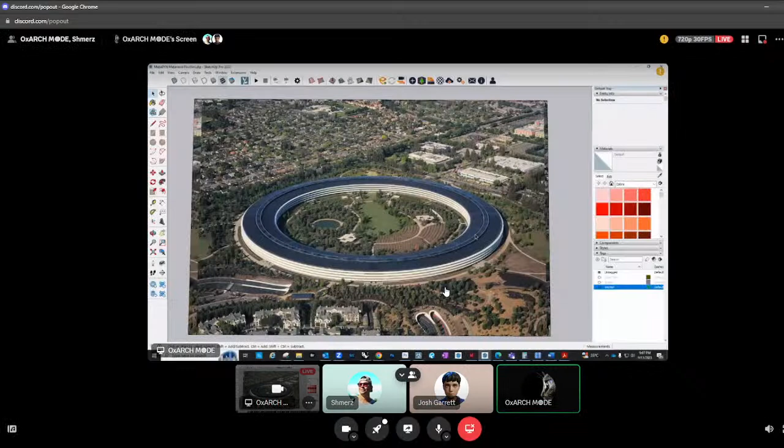Shmerz and Josh reached out to me with a project idea that they're working on and needed a bit of architect experience. They were initially inspired by the Cupertino Apple headquarters. We're going to do a modeling exercise today to show you a software that's a bit simpler than Blender, but a very common software that architects use. We'll explore how the software works at a high level, and also try to design something within an hour time frame.

Excellent. I want to say something. This project has the goal to make one space, a space for MetaDyn, the project of Josh Garrett. We want to make lives about every step needed to make your space, your environment, from scratch, and we will use Unity and specifically the Spatial Creator Toolkit. So enjoy these incredible guys who will show us how to use this amazing software.

All right, shall I get started? Sure. For anyone who doesn't know yet, SketchUp is a free software. It starts off with this very simple toolbar on the side, and you'd be surprised how much you can do with it. Everything I'm going to do today only uses this toolbar, to show how easy but also how flexible it can be. If there's any questions, feel free to ask. Because of the 1 hour time frame, I've got a few things set up, and I can explain as we go.

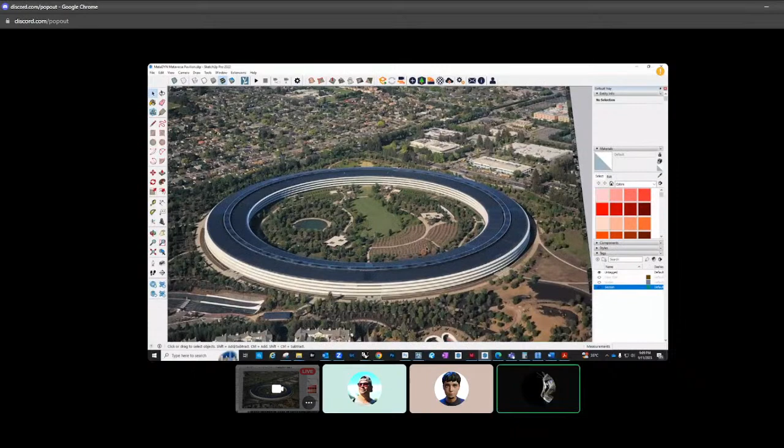When they reached out to me with the Cupertino headquarters idea, it was basically the campus and this landscape space in the middle that was very fluid and open. The idea is you have an indoor space for showcasing elements, whether avatars or unique elements. And then the campus space will be for showcase and tutorials, and I think there's even going to be a racetrack.

So the idea here started off as a section, and it's a very simple section, but I can kind of show you exactly what we're thinking. So we know it's going to be round, so our floor plan is round, and we have a decent amount of space of roughly 100 meters diameter. And then the building itself is just going to rotate around this circle, and then we'll have a dynamic landscape that can be adapted in further videos.

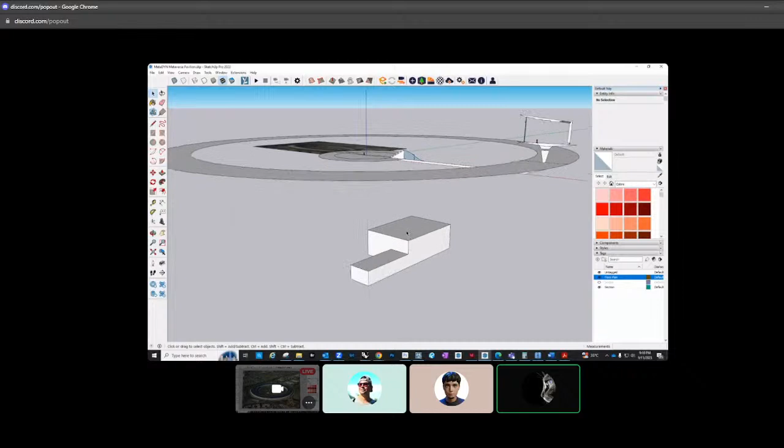So in terms of how SketchUp works, essentially you draw lines, and as you draw the lines, you eventually have a face. For anyone who's new to SketchUp, they think that maybe they can just keep expanding and expanding. But the thing about this particular method is it's like the sticky method, so it's very difficult to edit. So there's an ability to group something. By triple clicking something, right click and make group. Nice. Groups, when you edit one, doesn't edit the other.

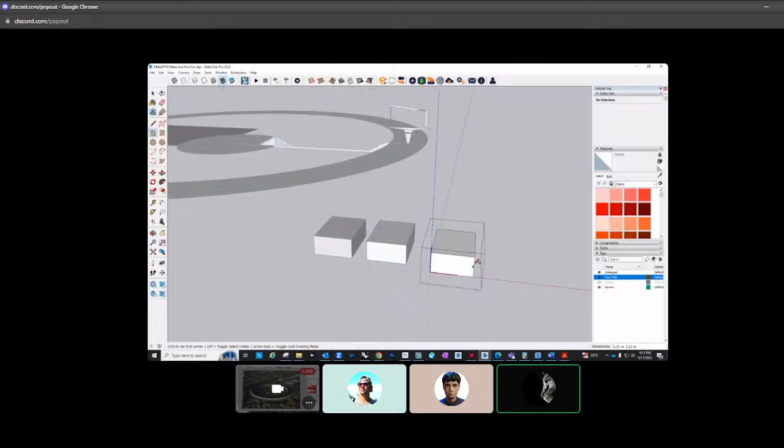So if you want to create something that will be edited many times, whether it's some sort of detail, a mullion, or any sort of architectural element, you'll make it into something called a component. And this component can be named, doesn't have to be, but I know that in Blender, if you name it, it will be easier to find it. So if I make a component really quick, you will see that if I edit this one, it will edit the other one. And this is just the basics, so always model with this type of mindset. So a component is like a prefab in Unity, I'd guess, or something like that.

Cool. And then one last thing, say you've already placed the components, but you want to make it unique. You literally right click and you make unique. So now this one is no longer the same as the other ones. So that's the basics for how to model. Once you get these things down, the rest is quite simple. There's an ability to revolve, which is basically just taking a profile or a pathway and then revolving it. So we'll be revolving as well. And then you have scale and offset. So really within all of this, you have all of the shapes, squares, circles, and so on.

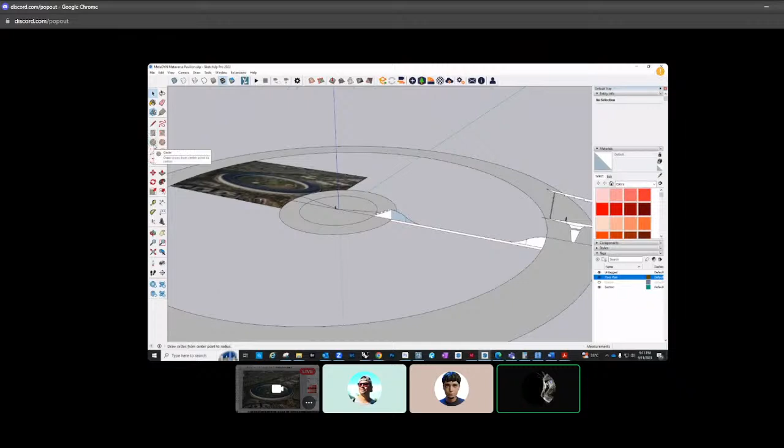But it's really important also to mention that since we're in a metaverse space, the circle itself is made up of a series of polygons. So if I type 12, I will have a 12-sided circle. And this is quite useful because when you're trying to reduce the number of polygons, you can reduce it here quite easily. So when I made this circle, the least amount of facets or edges required, while still not making it too faceted, was around 120. And if in the future when we import it into Unity we need to reduce it, it's quite easy to reduce.

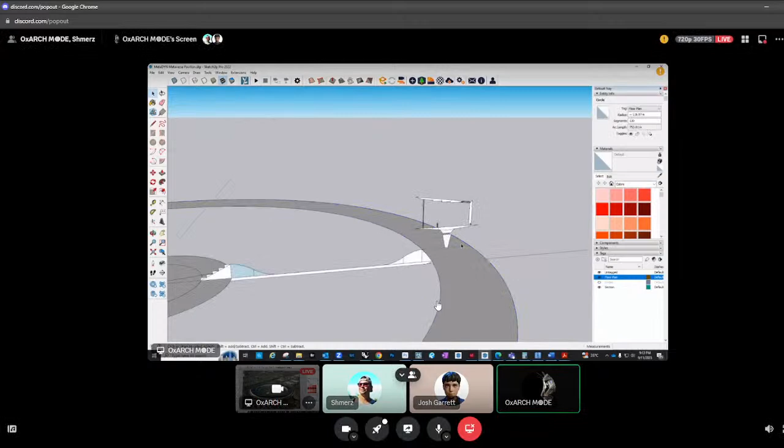Okay, so regarding the floor plan, it's quite simple. We have the circle ring building, and then we'll have the landscape space here. In the middle, we'll have an amphitheater space where there can be a screen for tutorials. Alright, so if there's no questions yet, I will just get started. Essentially, I'm just gonna take this ring, paste it, and start to revolve some of these architectural elements. And you'll see that very quickly we can start to build a space.

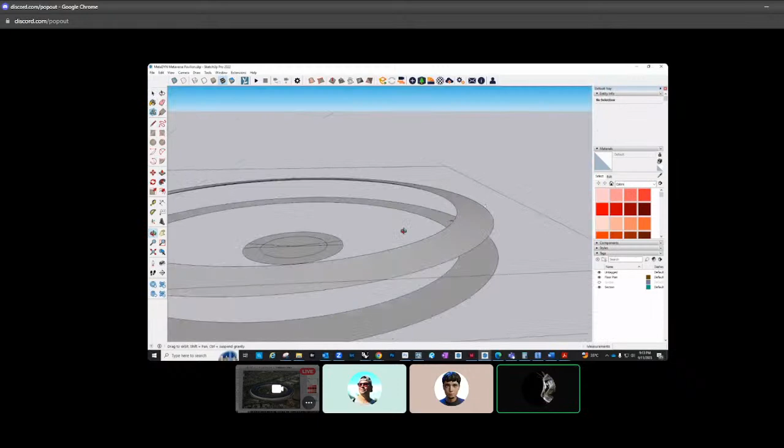Oh, wow. Yeah, it's just that fast. Wow. So I'm actually going to take all of these elements, and this is our section. We're going to revolve around this face. So we have all of this, and we just go like that. So all of that's revolved now. And we just do the same for the rest. So this is going to be like a back wall. Then we have the floor, which I'm going to include some glass into.

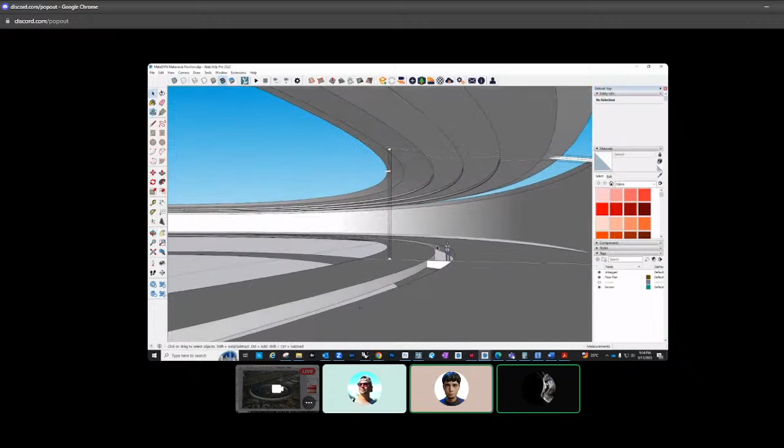Alright, so now, because nothing is touching, it's fine, but I'm going to make all of these into a group. I'm just triple clicking and that will select everything. Okay. And what else do we have here? Make group. Okay, so that is part of our section. Wow. This is a bit of the interior space. So underneath this wall is going to be glass. Up here will be glass. And then facing the courtyard will be glass. And then I'll also introduce some glass in the floor to make interesting moments. And then we'll get to the landscaping.

So for the glass, what I'm going to do is first take these mullions. And we don't have to have mullions, by the way. It's the metaverse. We can do anything we want. But I'm going to take these mullions and paste them. Actually, I will paste them into, again, this profile.

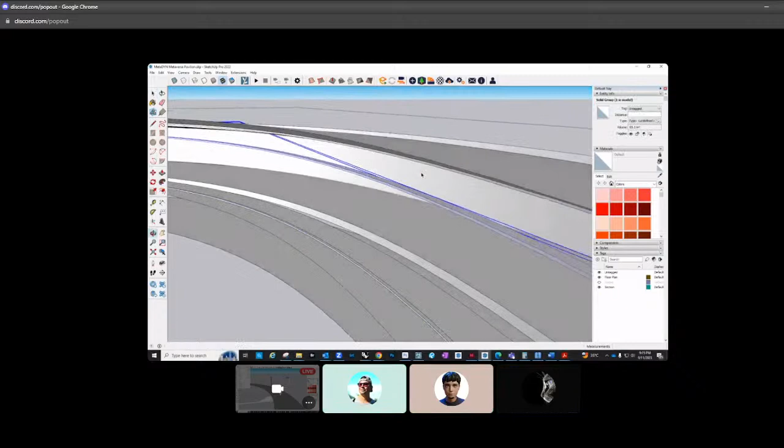Basically just need something that's circular anywhere on the ground. And we'll just start to array those by using the follow me tool. Extremely easy. And then we'll make those into a group. And here will be a group. So far, fairly easy. Now we get to the glass.

Now the glass right now is just line work. So what I'm going to do is I'm actually going to draw a line here, and it's going to make that a face. I'll select the faces, bring them back to here. And then after I array it, I will just take the front face because that's all I need. So I will copy that, delete the rest, paste.

And this one, because we only need the front face, right? Because right now it's thick. It has the full thickness. Okay. So I copy that, triple click, delete, paste, make group.

Okay, so maybe now is a good opportunity to talk about materials. So right now everything is pure white, and you'll notice you have this white and blue. What this means in SketchUp is if I reverse this face, this is facing the opposite direction. And when it comes to modeling and gaming engines, you want to always have the white face facing out. So in this case, I will just select the face and reverse face.

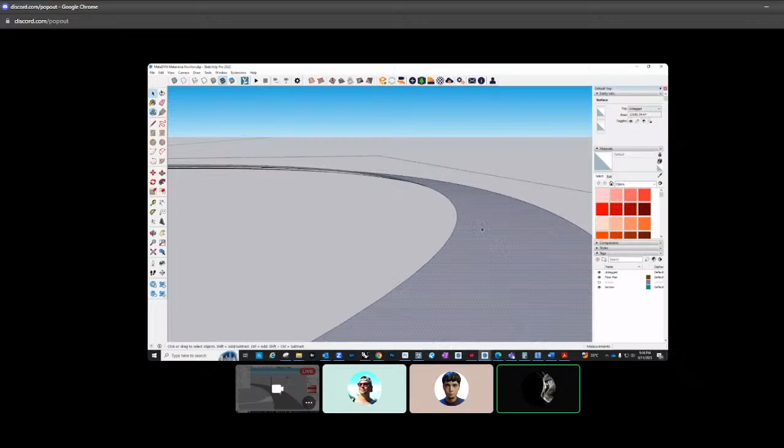Now, if I had a material applied, I wouldn't know if it was facing outward or inward. So there is this toolbar here called Styles, and you'll see monochrome, and it will essentially show you what is facing out and what is facing in. So that's just some key to note there.

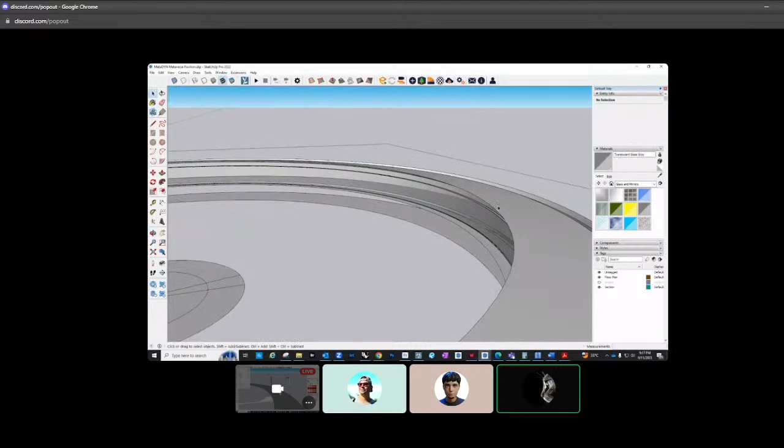But regarding materials, so I will select this face. I will go to SketchUp materials, which has a decent amount of materials. So we'll just use the basic ones for now. And I'll just select this gray material and click. And I have a glass material. And when you have this in Blender or Unity, you will see this exact name, translucent glass gray, which will help you if you're going to change the material later on.

If you want to make a custom material like this one I have on the ground, I'll show you how to do that. You just have to select the face that you want the material to be on. Go to import. I'll just go to my desktop, grab this random travertine material here. And before I go, I forgot: when you first open SketchUp, it will not be set to texture, so make sure you have it set to texture. And then you will be able to draw the size manually, like so. And it will fill the rest.

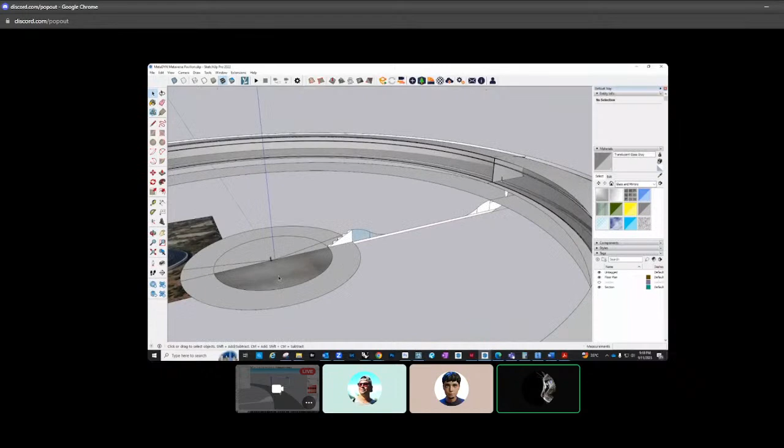And so if you want to edit this texture, right click, position, and you will see how the texture fits within your space. But again, you'll most likely be editing textures in Blender or Unity or something like this. So that's the basics of textures so far. If I need to copy this texture, I just go to the eyedropper tool, select my group, paste it, and you'll notice because it's a circle, it's going to be like that, but in Blender this can be solved. So that's quick textures.

Now let's go back to our section here. So now we have the singular glass. If I want to do the floor glass, let's select this. Here, paste it. And I'm gonna swing inside the building because I can't actually, well, I guess I could. Nope, see, it's not gonna, okay, it will. So you might have to swing inside of the building.

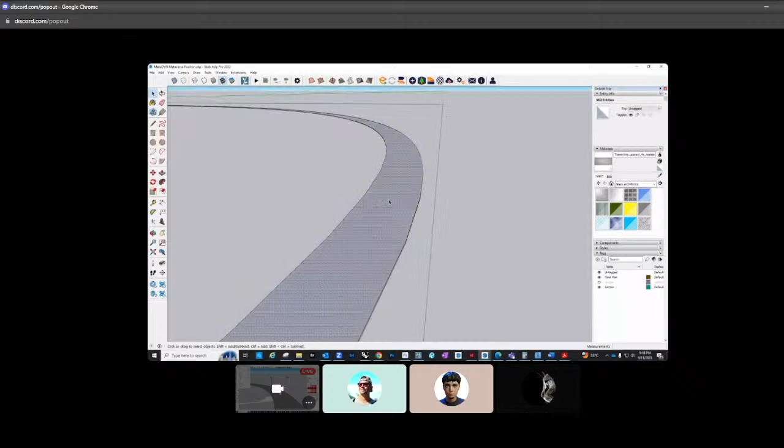SketchUp works in a way where you point is where you go. So wherever your mouse is, that's exactly where you're gonna move towards. And then if I need to orbit to get outside or inside, it will help you from getting stuck. Because sometimes you'll be in this space, and then you'll notice as I'm zooming, it can take a bit of time. So it's good to also just know how to orbit and get out of there. But it's still very easy.

Yeah. And in the theater, sorry, Drew. In the theater, we have a question from Cyrus.

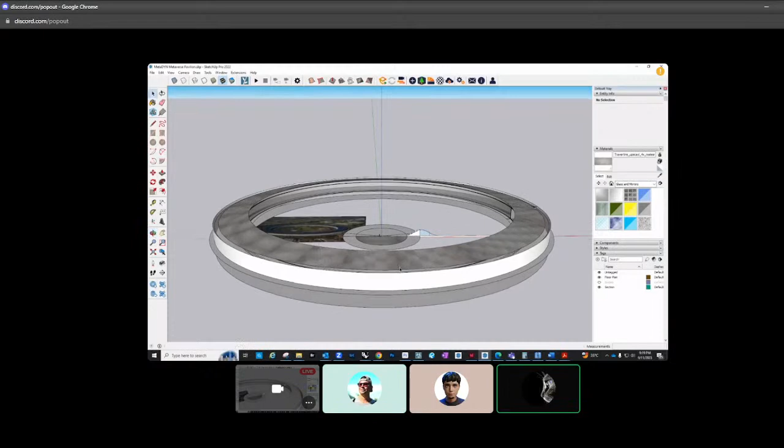His question is, why would one use SketchUp as opposed to Blender? Okay, so here's the thing. What's funny is architects use SketchUp. There's no limitations. We can use Revit, Rhino, anything, Cinema 4D, doesn't matter. The software is not the end all be all. It's just a tool, and architects typically use SketchUp, so that's just why I'm just showing another way. It can be done the same way in Blender, but this is, let's say, a slightly easier tool than Blender, and it's good to show flexibility as well.

Yeah, thank you. Yeah. Yep.

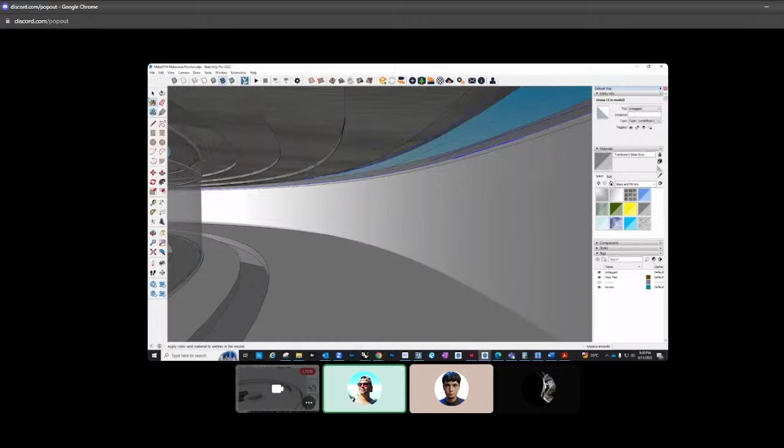Yes. And he asked also about the texture, the material in Unity, like if it's better to add texture material in Unity. I can answer to Cyrus. Yeah, it's the same as Blender, you know. Of course, in Unity you need to make a better effect, also a normal map for one texture. Normally we create a normal map, I think we will create it in a future episode. So it's the same normally, and I can see that it is very fast.

Yes. And normally, for me, doing this kind of thing takes more time. You know, I'm not doing this kind of thing because I'm not a professional architect. And a lot of times it's not either or, right? Maybe SketchUp does some things, and then Blender is the second part of what you're doing, to kind of give you a head start on it.

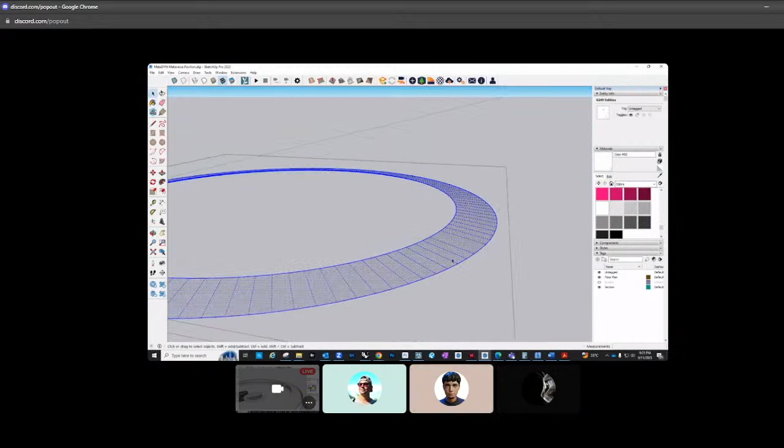So as architects, sometimes if I'm doing crazy organic forms and shapes like this, I would use something like Rhino, and that's a very flexible software. But in this case, I just wanted to show that you can do, let's say, complex forms also in SketchUp in a very quick time.

And SketchUp already has, is it still called the 3D Warehouse, where you could get a lot of free assets and really get a head start on some things. So for those that don't know, it's a decent place if you want to grab models. I don't rely on it personally as an architect. I usually create everything custom, but it is there, and it will allow you to maybe speed up.

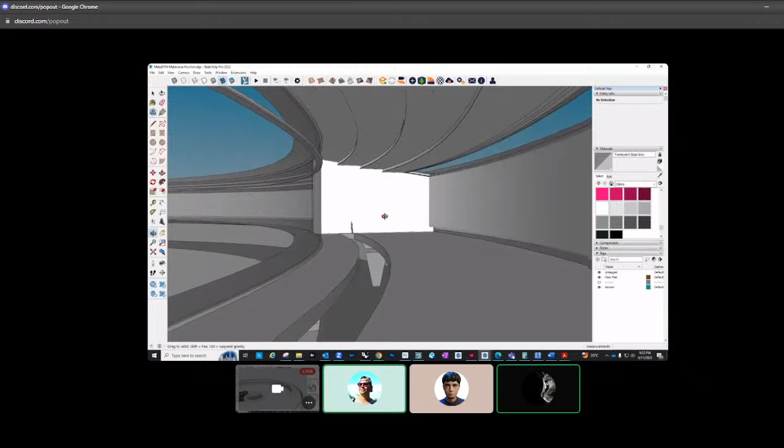So everything so far has been revolved. I have the glass underneath the display wall with a slight chamfer there. We have the skylight coming in. The full wraparound glass where you're going to be able to see the full courtyard. And then I was thinking that this can be water, so if we just go to water, you can use this transparent water. So as you're walking here, you'll be able to see a bit of water. Very cool.

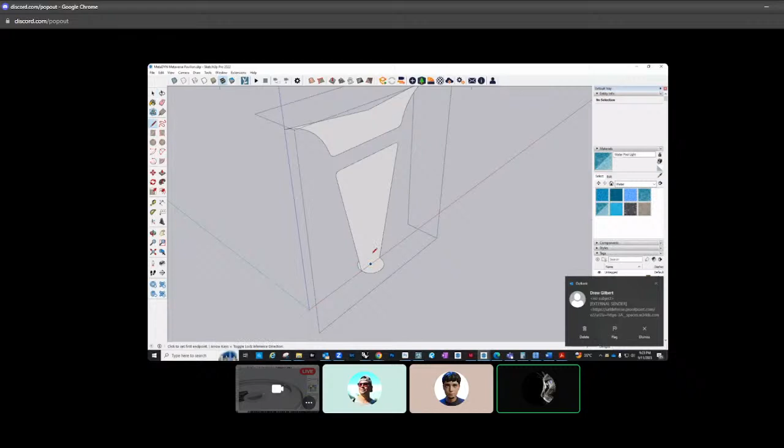And then we also have our column here. So let me just take our column details, paste them, make a group, and then I'm going to make a circle that is not too many polygons, maybe say 20. And you'll notice it's like green or red or blue. It's a bit confused. If you just hit up, it will force it to be z-axis. And then I'm going to cut this in half so that we can revolve around our pathway. There's the top. There's the bottom.

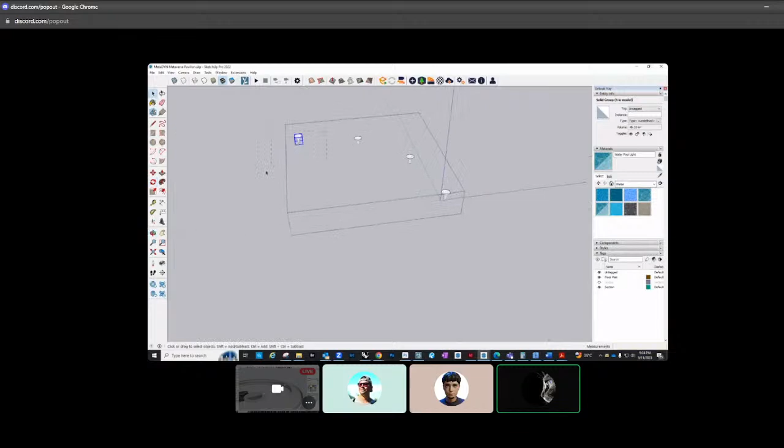And I took some liberty here because it is the metaverse, so we don't have to... Yeah, exactly. No engineer. So this column, I'm thinking, will be rotated 8 times. So I'm going to go into this group, make another group, so that when I copy it and array it, it's already within that group. So let's say I go here, divide by 8, and I already have some columns. Find my axis. I will admit I am decently speedy, so you may not be as quick at first, but of course it's quite easy to learn.

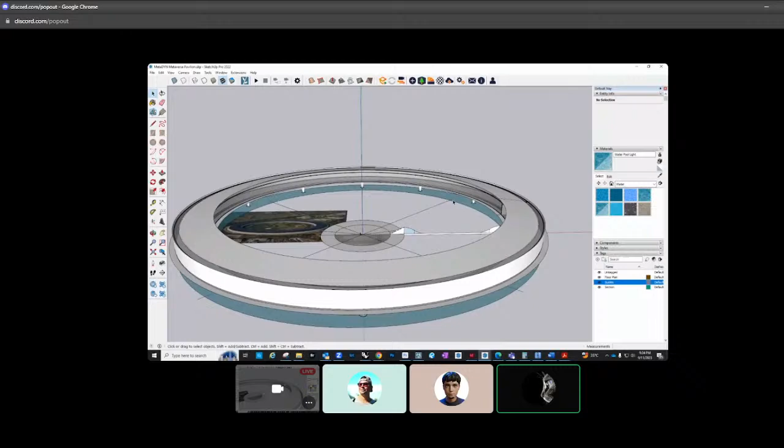So that's what I'm thinking here. The idea is that there's roughly 8 columns taking you around, and the spaces, if I go to my floor plan, the guides, that's right. So within these, you can have kind of 4 additional axes to additional spaces. So you can either cut the water, or go through it, to beyond, and you could essentially have the racetrack go out and beyond and so on. Nice. So that's the building so far. I still have some details to do.

So let's say I need to actually create a mullion system for this glass. I'm just going to delete this face because it's in the way. So my mullion is going to look like this.

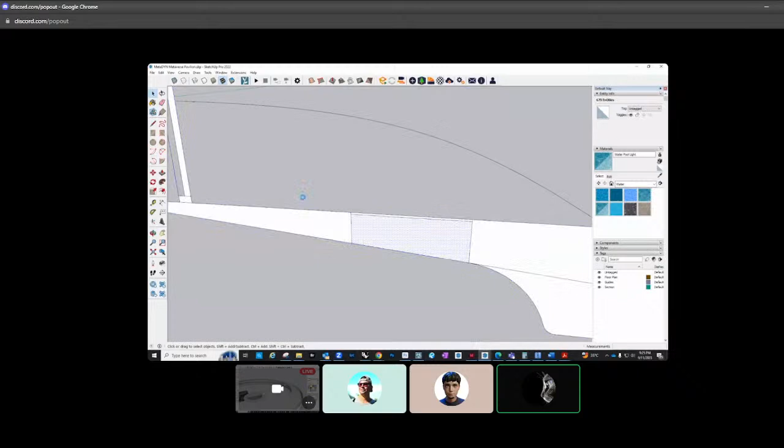And I don't need to actually array it or revolve it, so I'll paste in place. And this one I'll make into a component because I will be using it many times.

Because it's components, I can actually leave it as is for now. But I want to actually make it a component inside, so I go inside the component, then I can make it a group. And I'll just exit that area. I'm gonna make a decent amount of these, let's say 20 of them. Yeah, that seems about right. First, I'm just making the piece, and then what I'll do is I'll detail it in a second.

Nice, so we have 20 of those. And I have a question, Drew. Yep.

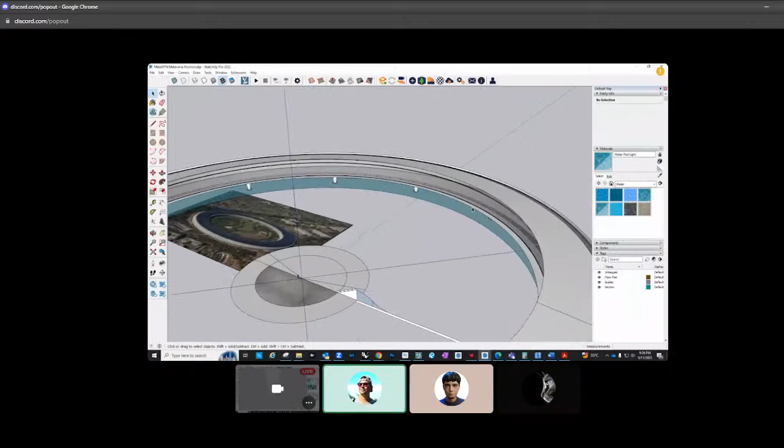There is a way to see how many vertices you're using in SketchUp, because normally I have this problem when I'm making something in Blender, because when I'm importing after in Unity, what we will make is not like a normal video game, but is a WebGL. It means that you have some limitation, like for the texture and also for so on.

Okay, so I just made... I was supposed to make this into a component, but it's fine. So yeah, to answer your question, you're asking how many vertices there are.

If we go to model info, you will see that there's 43,000 edges so far, which if you divide that by 4 would be 10,000 faces, or 16,000 faces.

Yeah, okay, this is a very important point because we can stay at the right level, or a little bit up, but you can see when you do the process. This is very, very important. Yes.

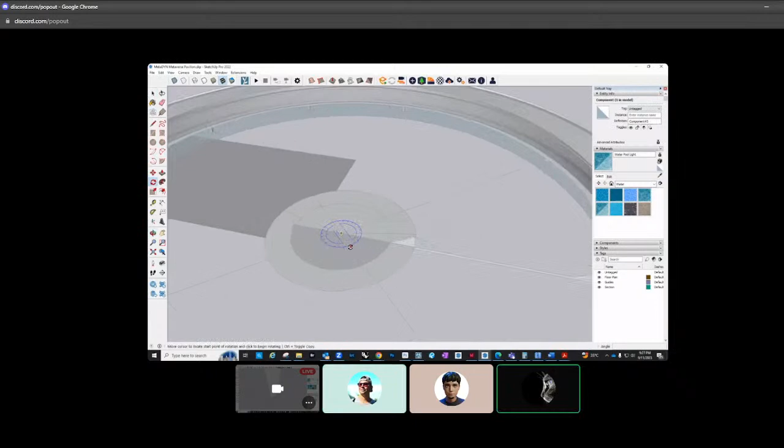So here I've made the component, so now you can see all of those are editable. So now I can expand it, do any sort of additional details as necessary. So maybe it's like, do this way and point you that way. We have essentially this radial mullion that goes all the way around. It's not required, but it does add a bit of interest to the model. Very nice.

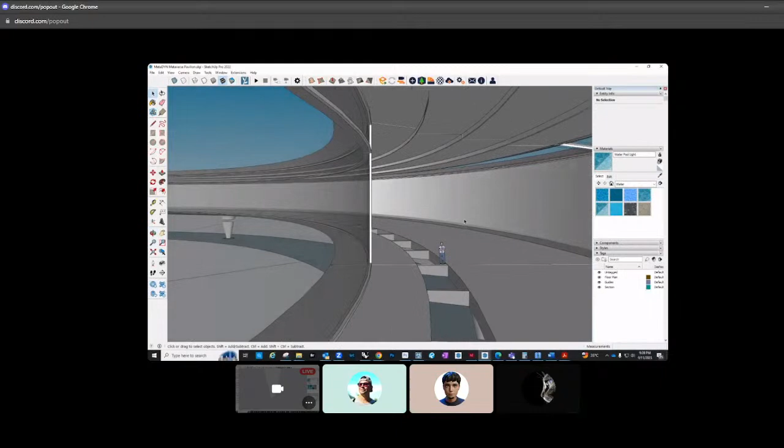And let's see, what else do we want to do? So I'm assuming there will be like a teleportation of some sort that takes you inside, so we don't necessarily have to do a stair or elevator of any sort, but of course it's up to us.

So for this, what I was thinking is this is water, and then we have like a ground, and we have a detail here. So the water is kind of this scoop or reflection pool. And then in later episodes, we can make an infinity water plane, and essentially this water will just bleed into the infinity water plane. And then I'm thinking we can have a berm that takes you a bit lower, so you start down here, but then as you explore, you find the water, and so on. And then that berm also takes you to the amphitheater, so it's not revealed to you immediately, you kind of have to explore and find it.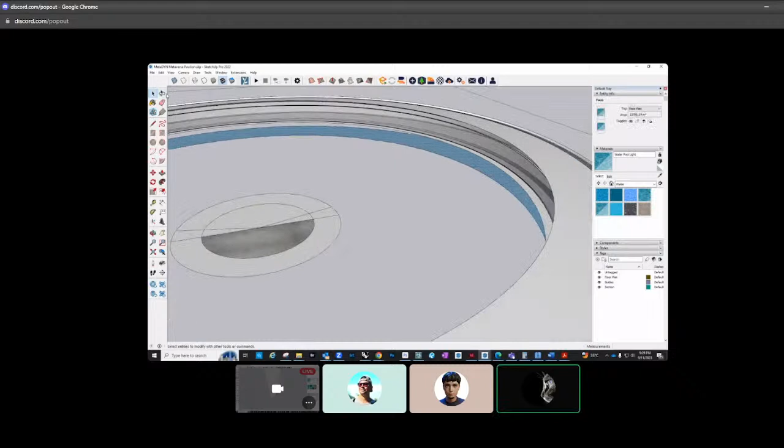So let's start with the water plane here. We already have our water top piece. I'm thinking I can make this into a group and paste this detail here. Also make it a group, but I'm going to extract this line here. No worries, we can just revolve from here.

Right, so that's our water plane that's going all the way around, and we will also do the same for this detail. First, I want to make this into a group. Just gonna select everything, delete, hit paste in place. Then we come back here. I need to bring this back.

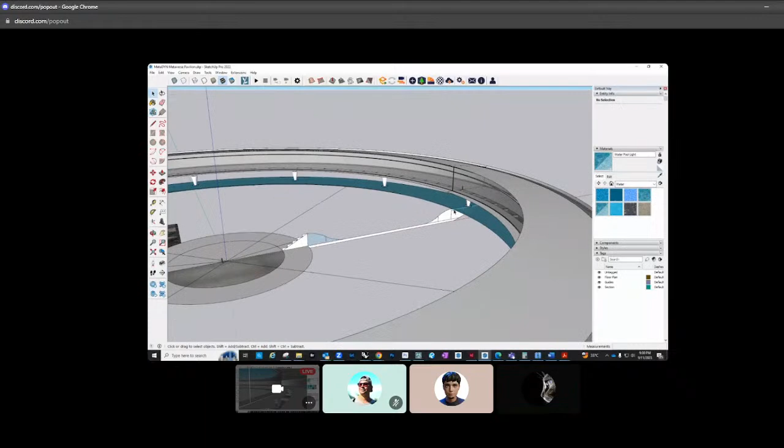Yeah, I love that cross-section thing that you're working with to show that angle of the depth along the way. The section? Yeah, the section. Yep. So I'm just gonna bring this back and delete everything except for our edge.

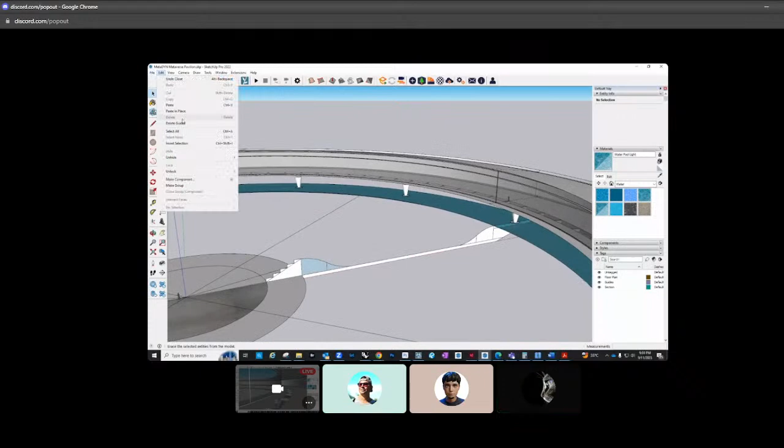Just want to keep that so we can revolve everything around that. And then we'll take these two slopes, put them into groups, take our edge in. So here, the question is if we reached a point where we needed to reduce this quantity.

Right now this is based off of, I think it was like 40. So if we need, we can essentially remove this face, and yeah, it was at 40. We can make it 15, for example, to reduce it. Quite simple and quite easy to control. So I'll do this one as well. Now that one is 15, and we'll do the same here.

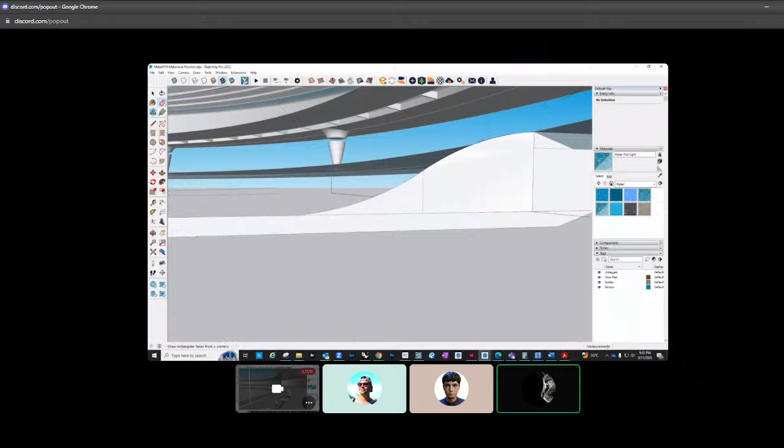This is just a simple arc. And you'll notice it created a face at the top. We can just delete that. Let me delete this one as well. Okay, now we can revolve.

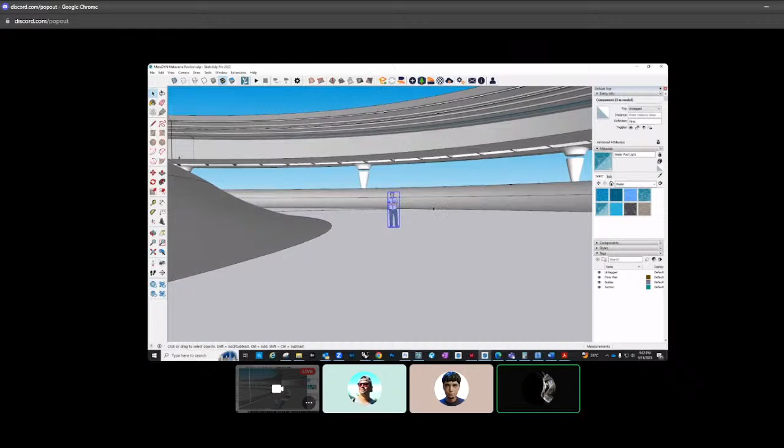And this one as well. We have this kind of interesting courtyard now, and when you're actually down here, the human scale is... It's always good, SketchUp comes with an automatic human scale, so it's very easy to just move him around. And then we can orbit our view to see the guy. So you'll be like within this bowl, right? And then you get floating columns. And then if you walk up to the top of this hill, then you get the water. So it's a threshold.

And now we will rotate our ground. We add our revolver, select the revolver, and we revolve the ground. So that's what we have so far.

Wow, pretty easy, like 30 minutes. You made it, amazing. Yeah, so now why did it take Apple like 3 years or whatever? Yeah, we need to call them. Maybe they will hire us for the next one.

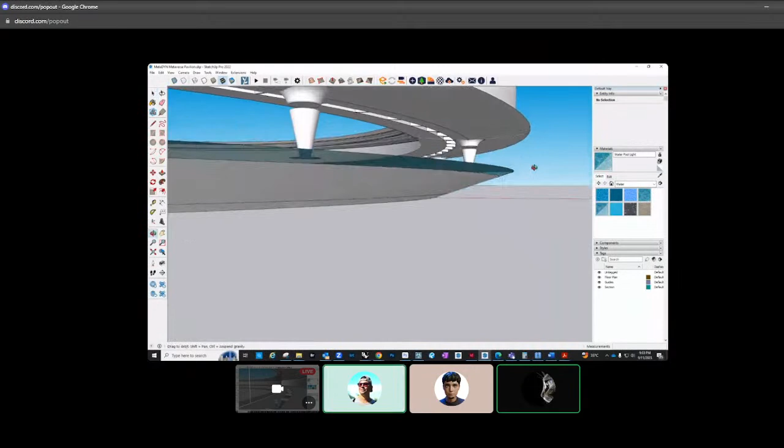Yeah, so it's like this overflow. Oh, here, there it is. So the water could, in theory, be a waterfall, but again, it's not required. But I'm imagining that this whole thing is infinity, like water, so you're like within this floating thing, right?

One thing to note about SketchUp, there's no such thing as a reflective material. So if you wanted mirror or metal or anything like that, it wouldn't be viewable until you get to Blender or some other software. But you can always, yeah. Good to know.

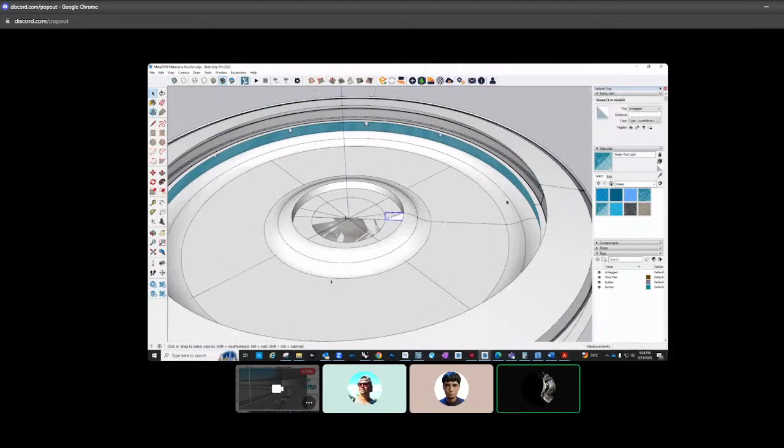Okay, so let's say I'm going to, I was thinking to make a berm inside as well, and then the seats are kind of just floating within the berm. So first I will create that, grab that, and then we no longer need that. So this would be like a grass mound, and you'll see that it's very easy to do grass. I mean, there's nothing insanely special about it, but it's a good starting material, and it's named so that you can find it easily.

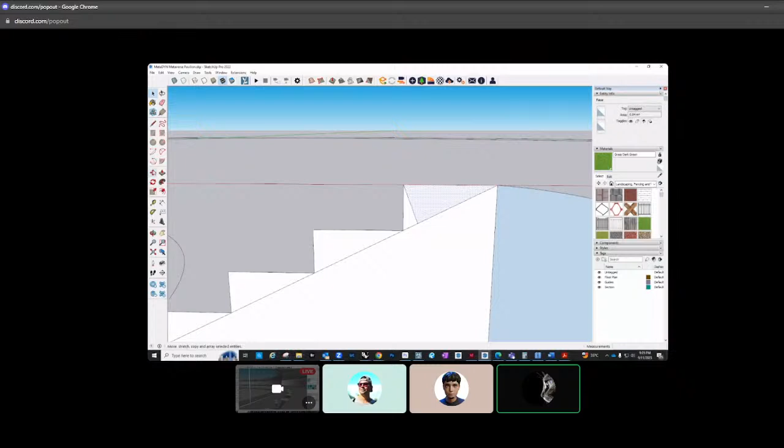So far it's a bowl, and then I'm going to cut out some areas, but I think we can change the detail of this stair a bit so that it's a bit more revealing the grass. So let's just take these, multiply by 5, multiply by 4. Looks like we have an edge issue here.

So what I will do is I will just take this, exit the group, put it into a group, open the group, and then just make these times. I just need my revolver again. It's like, okay, there we go. So we have our steps, but I don't want to go full.

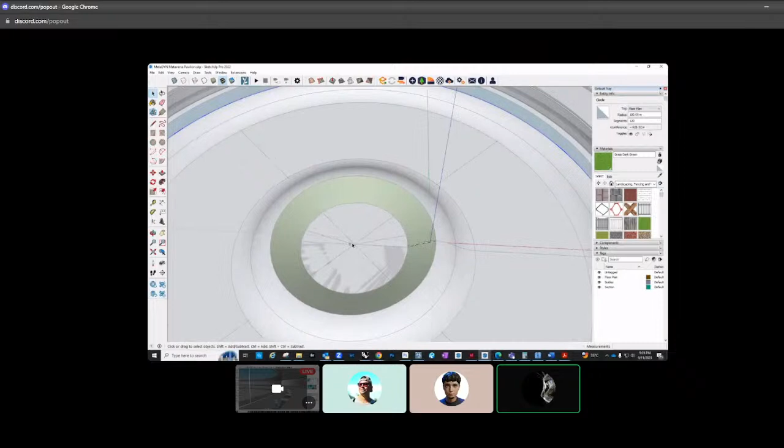So I will take this line and this line. You'll see what I'm doing in just a second. So I'm essentially only going to revolve this portion. So I'll do this 5 times, and it will only be that part. So it's a half amphitheater.

And then once we unhide the view, you'll see the grass underneath the seat by a little bit. Cool. Get a little peek, nice.

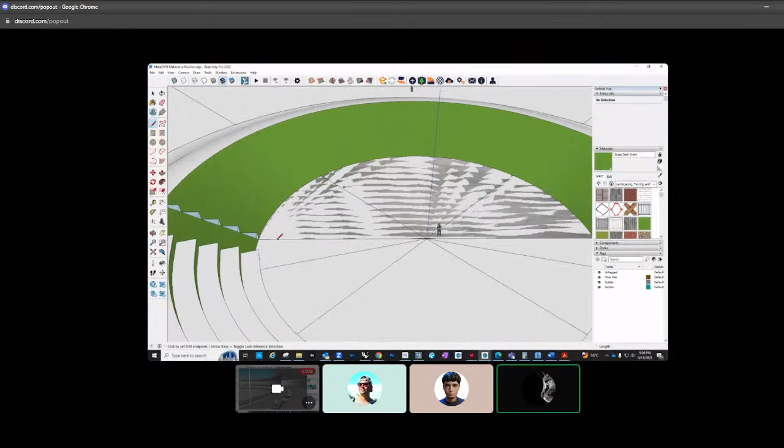Okay, so at this point, this is where I reached conceptually, but I'm thinking that let's carve out something. We can have the display. If you guys want it to be curved, we can make curved, but I think it makes more sense to just have a screen that's maybe somewhere here.

And you know, in spatial they have just the display, right? And it's floating, so you don't necessarily need to add it here, correct? Yeah, and we do have new capabilities with a virtual camera that we can now project that onto any surface.

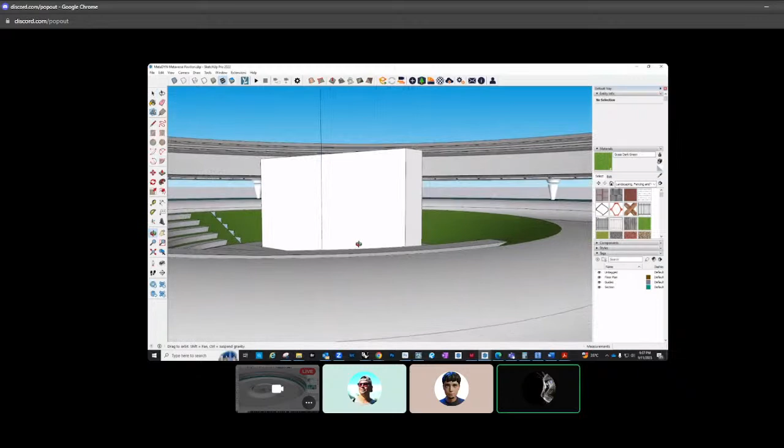Interesting, so it is an option to do either a curve or whatever. But I was just thinking it could be something as simple as this. You would carve out an entrance on both sides, and then you have your screen something like this. Then the grass and trees would just fully engulf this view range, so all of this would be trees and things like that. I'll leave this as a placeholder, but we can detail it later.

Through here, I'm going to carve out a walkway so that you're not just walking over the berm, you can essentially cut this out. Let me detail that out in plan, and then we can continue.

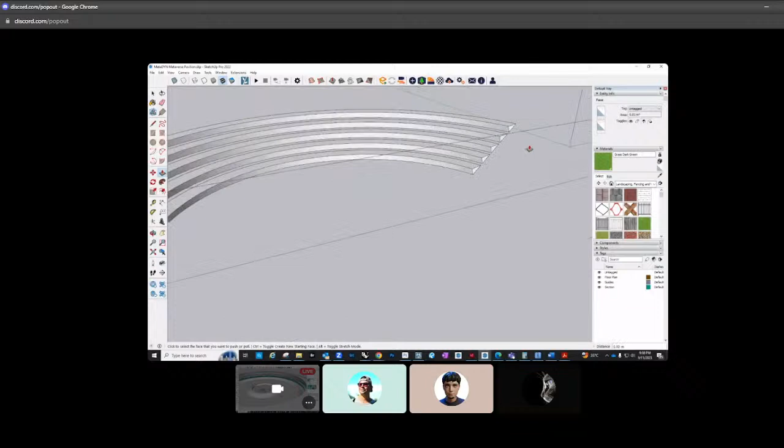That looks like it extended farther than we anticipated, which is fine. If I wanted to detail this—oh, I see what it did. So this went to there. There we go. If you double click, it will remember the dimension that you scaled, which is a very fast trick.

Simple double click. I know, so when people say why SketchUp, well, there's some reasons. I won't give all the secrets, but if you use the software for a while, you'll notice you can really fly.

So I'm just going to take this face, push it, and make a wall here that can be used to kind of engulf or encase the space.

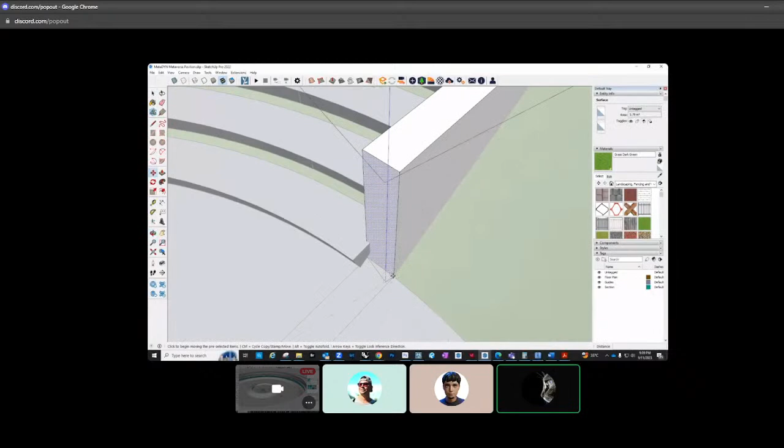And if I need, I can extend it further to say there. So what I'm thinking is I can create this little arrival—it's a bit more of a... let me do that correctly.

So you'll see this from a side. When somebody enters in, they're a bit more hidden. And then I'll just copy this to the other side.

And then what we need to do is make some sort of face that will extract—here, here, and the shape's not particularly important. It's just that we need something that will fully engulf where we need to cut. Got lost there for a second.

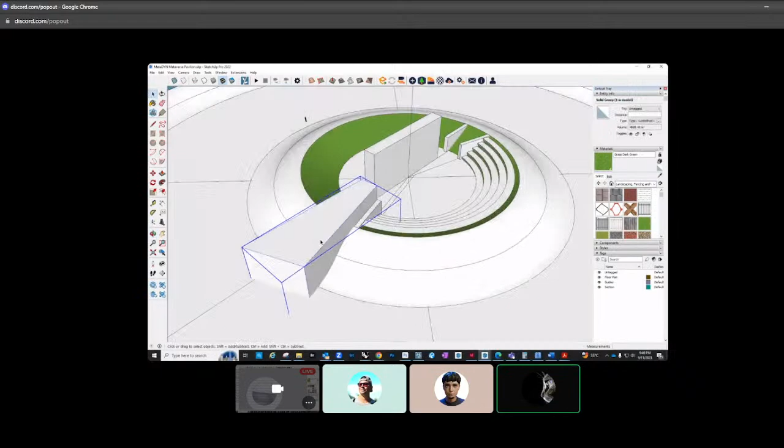Another interesting thing—there are ways to mirror, but just to show you that you don't always need to mirror, you can flip along an axis. For example, if I flip along green, flip along red, flip along blue. Let me see which one I need. Should be this way.

SketchUp has a lot of plugins which are very useful. I just, for the sake of this video, wanted to show you that you can do almost anything without plugins. Being a little bit finicky here.

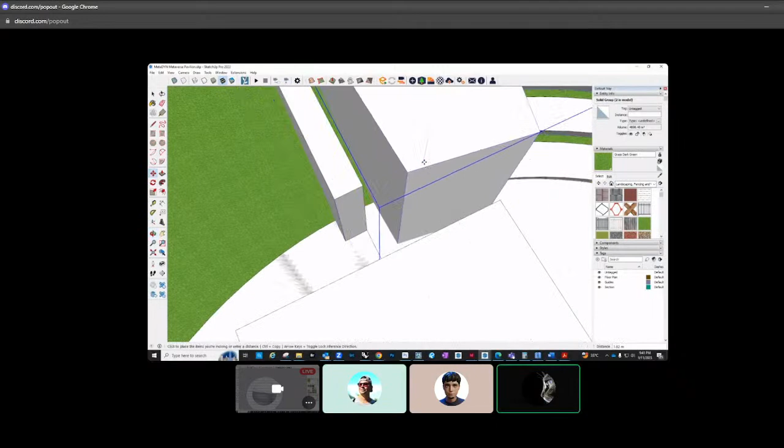Let me just drop it down and rotate it. Okay, so we have our extractor. It looks like this needs to move just a bit. And then I'll take this here, and you can connect by vertex.

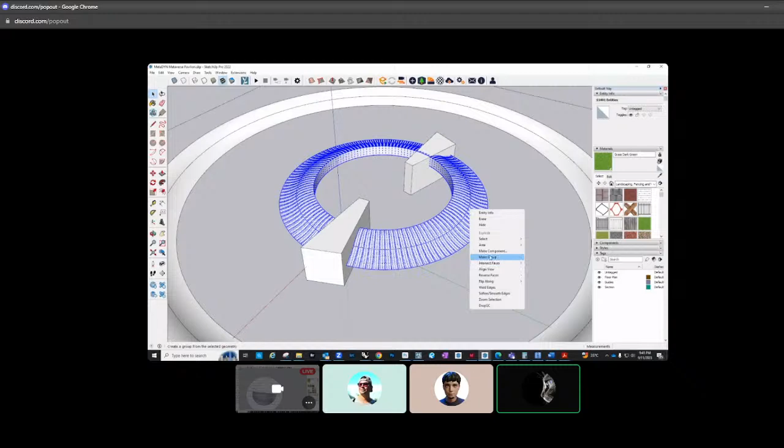So I'm just going to intersect face, but notice I'm intersecting face with a group. Once I intersect the face, I can remove it. But I'm actually going to do this slightly different, taking this up to somewhere, because when I intersect face with model, I don't want it to intersect with every single other thing.

Now I can delete these, and you'll see that I have the faces or the line work. I'm going to copy that into my group and just delete all of that information.

Now, of course, Boolean can work as well, but I'm using only the basic tools at the moment.

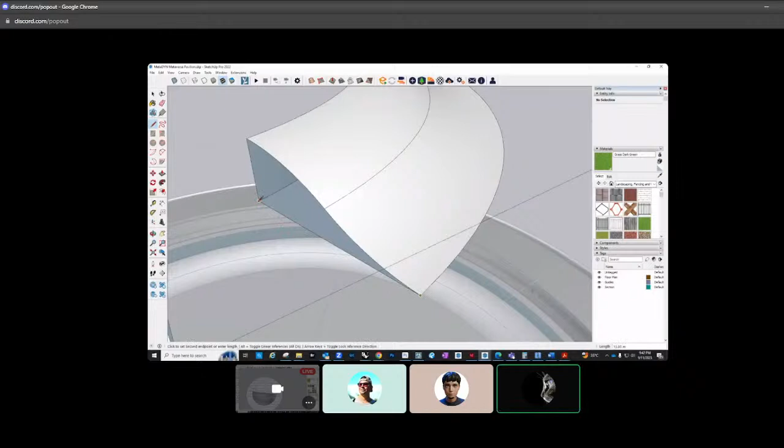Now I will make a face here and here. So now we have our berm. Move this face, I'll take it back down to where it was, which was 100 meters.

Now, we didn't cut this one, but as you can see, we have line work here, so you can actually uncover this line work by holding Alt on the eraser, and it will literally bring back the invisible line work. Nice, and now I will delete it.

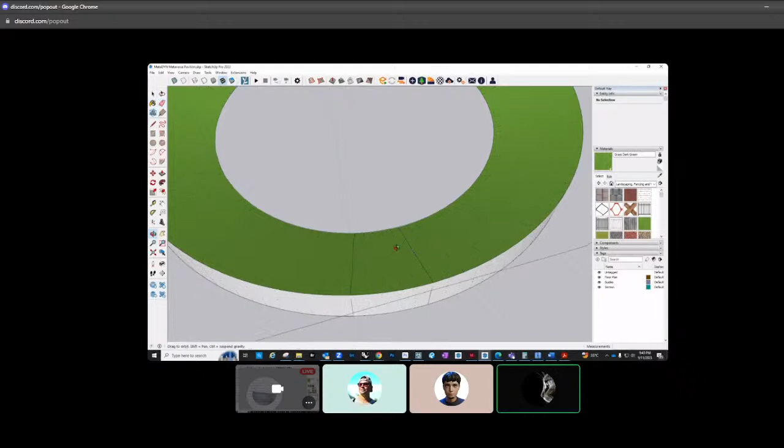It's up to you whether or not you fill this. I mean, it's one less face, right? But sure, for now, we can fill it. The alts, yep. Put here and here. And delete. We gotta get this line all the way up.

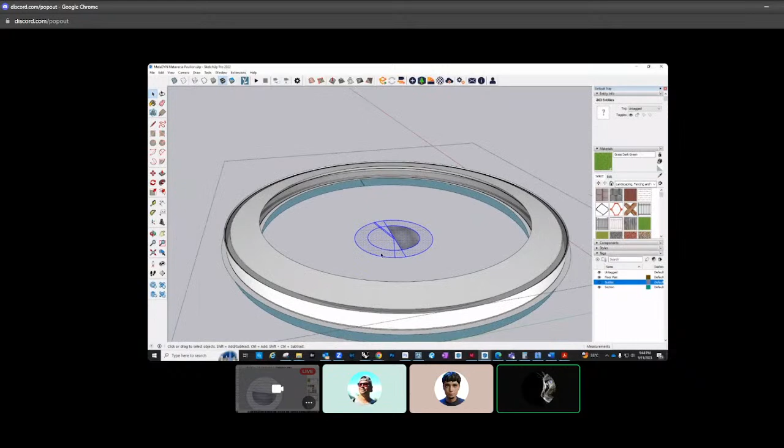So, are there any questions so far? No, this is great. It seems like it has a lot of nice little shortcuts that I haven't seen. I'm sure other tools do have them in some way, but this seems like it makes it a little bit easier to do this kind of stuff. Exactly. So this is why I enjoy SketchUp, because you literally can fly. You're not really limited by speed or anything like that. You can just go and you can keep adding details and anything you want.

So for example here, oh, looks like my glass face. Oh, that's our section. Okay, so I can turn off the section now. Start cleaning things up. If I wanted this wall to go straight through, we could do that as well. But yeah, this is the space. Wow. And just like that. So you can have displays, you can subdivide the rooms if you wanted to. You can see the scale of the human.

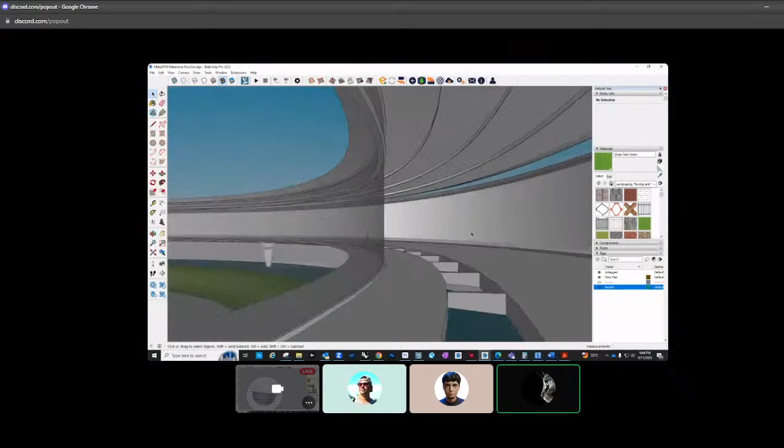So another thing to keep in mind is the size of the avatar and the space that you're designing for. I believe Spatial's around, or maybe it was another metaverse, but the height of the avatar should be considered. I think it's like a 2.5 meter max or something, but people will usually use a Ready Player Me in their scene to get that little guy in there. Not sure exactly how tall that one is. Exactly. I've seen somewhere it was like 1.8, which was a bit odd.

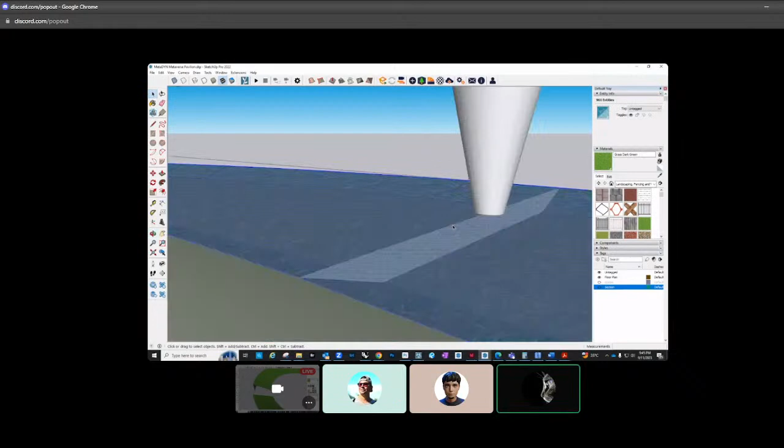Let's see. And I'll share one of my secrets. You'll notice that when I'm modeling, I can hide everything else. This is not readily built in SketchUp. So if you go to Preferences, Shortcuts, and you type hide, you'll see Hide Rest of Model. I just assigned the X key. And this is a magical tool. If you're new to it and you're running into walls and you're trying to orbit and it's a bit annoying, just hide everything and then you're only working on that specific area.

So super useful. Also, I know it's not useful maybe in Unity or such, but let's say you're working in SketchUp for something else and you want to hide these lines. If you use Control, you can essentially hide these lines. Say you're taking a screenshot and you don't want to see these, you can hide any line you want. You can even hide these ones. I don't recommend it because you'll notice it will start to give this weird defect.

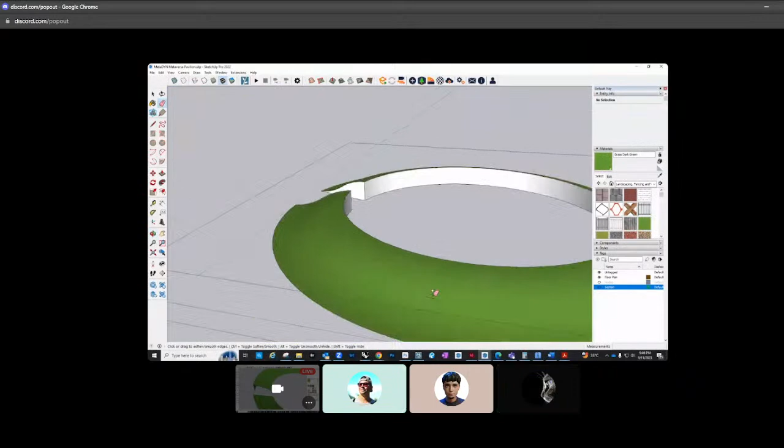Do you guys want to add materials or anything, or we can leave that for Blender and Unity, right? Sure, especially if we're using terrain stuff. Go ahead, sorry. Yeah, I think adding material now is a good way to see how it can make the texturing, because normally you have to map your material on the object. Exactly. So for example, in Blender, you will get the name of the material. So if I put this, for example, color A06, and I go to Blender, it will tell me color A06.

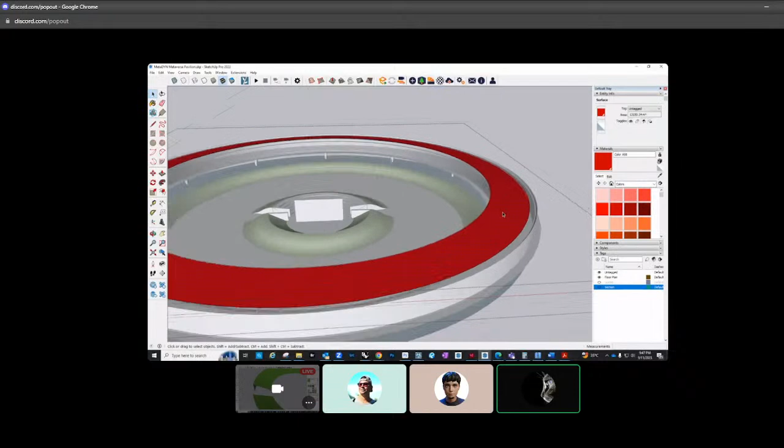So if I wanted this to be metal or some sort of material that is used in the metaverse, you can just name the material anything you want. And this model could be a series of somewhat strange colors because it's not going to be the final model, but you'll be able to know what is what. So maybe that's one color and that's another color. You can just go through and add all of your textures, so when you export it, they're ready and easy to find. Very cool.

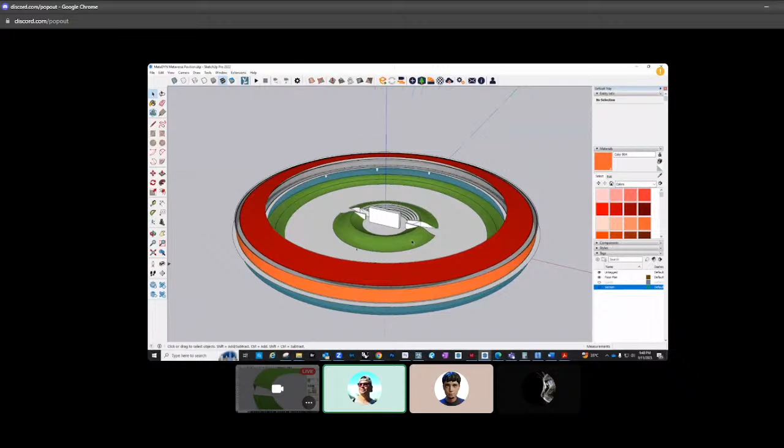Question for you guys: how important is it to model on the origin? Are you able to move the origin within another software? Yeah, the origin depends, because when you're importing in Unity, you don't have this problem normally. Normally when I import something from another program to Blender to make the adjustment or to prepare this model for Unity, I need the origin set for Blender. But when you import in Unity, if the origin is at the center in Blender, in Unity there is no problem, because you just have to drag and drop the item inside your environment. So normally...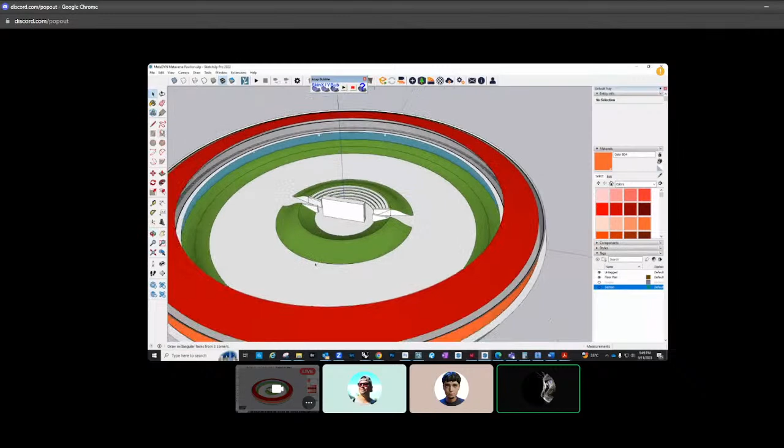So I'll show you one quick tool. Say you wanted to do berms, okay? If we use this freehand tool, I'm just gonna draw a shape. Maybe that's not the best shape. Let me try it again. Okay, so it's like peanuts, okay? And then I'll finish this one here. And then I'll make it into a group.

And then there's this plugin. It's called Soap Bubble. I can generate a soap bubble. I think I have to make it a group.

Yeah. So Cyrus needed a clarification about the process. Like, you can model in SketchUp, then bring into Blender to add textures and edges, and then bring into Unity. This is the question. I can start to answer, but if you want to join. So yeah, you can do both.

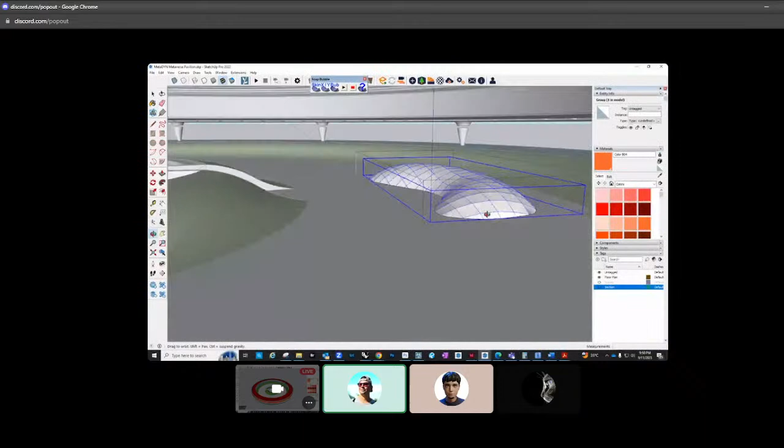You can do the model in SketchUp and after add the texture in Blender, but what I understood is you can do also the texturing in SketchUp. I think it's better, in my opinion, to do it in SketchUp, and after bring everything into Unity. So Drew, normally your way, what is the best way? Because you did something like that, but with Unreal also. Is it the same for Unity?

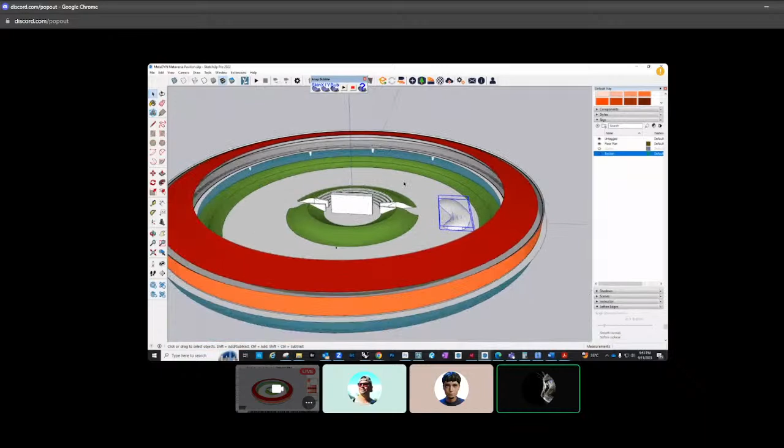So another point is if you do it based on an origin, if you say you exported your main model, the one we designed before, and then you wanted to add this berm later, as long as you have that origin, you'll be able to place easily into the model any modifications that you make along the way.

Okay. Yeah. And so this is just a really kind of somewhat low poly berm that you could have if you wanted. It's just through a plugin called Soap Bubble. It's quite easy to use as well, and it can add these kind of organic blobs within the landscape, so it can add a bit more dynamism. And I made it to where it's not extremely heavy, but yeah.

So are we gonna talk about exporting now? Sure. Yeah, we can go ahead and run into that. I think that's definitely going to be a part that our audience will be interested in.

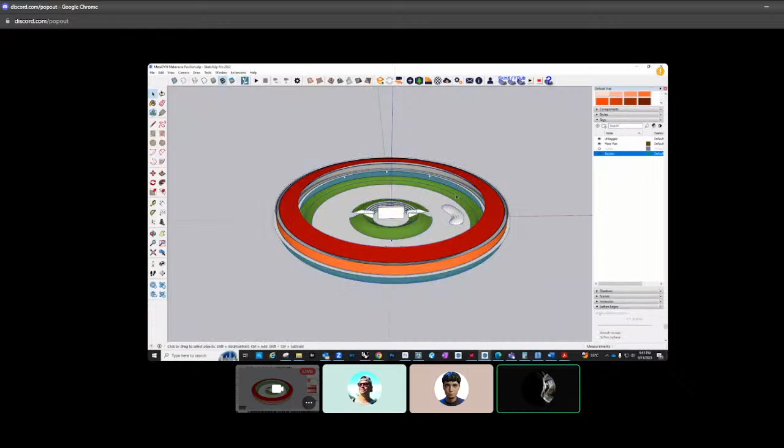Sure. So here, I can just make an entire group if I want. Select it. Very easy. Export 3D model and drop it down to FBX. Then you export, and that's it. So it will take all of these textures, the model, and then you're ready to import it into Blender or any other software.

Nice. Very cool. Is that an extra thing that you have to add to SketchUp, or is it default that you can do the FBX export? Pretty sure it's default, yeah. Okay. So you can see we have various groups, around 25,000 faces here, but within the FBX it's reading it as 32,000. A series of 15 materials, 2 textures, so quite simple. Nice. And that's it. That's the process.

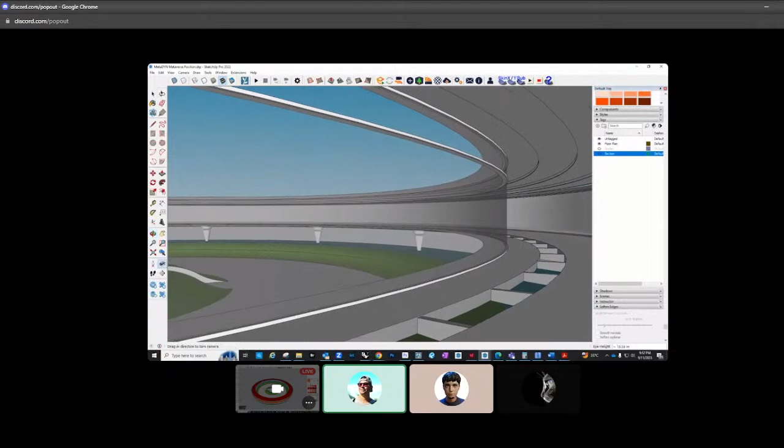And a question about exporting, for example, the water that is in a circle. Is it possible to export only this water as OBJ? Yes. So I have my group. So this water, if I hide everything else, you have this. SketchUp, File, Export, 3D Model, and you should have the OBJ option right there. Yep. Very cool.

So you don't need to go in Blender. I think if you are very good in SketchUp, you don't need to use Blender. So to be honest, this is the thing. When I was going into spatial and things like this, I only ran into the issue when I wanted to animate something. You can't actually animate objects in SketchUp. So say if I wanted this entire upper space to undulate up and down, I would have to do that in Blender.

Nice. Yeah. If I want to add, say, metal or something like that, I'd probably have to do it in Blender as well. So there's some reasons, but I would say you could do 95% of all the modeling and everything in SketchUp.

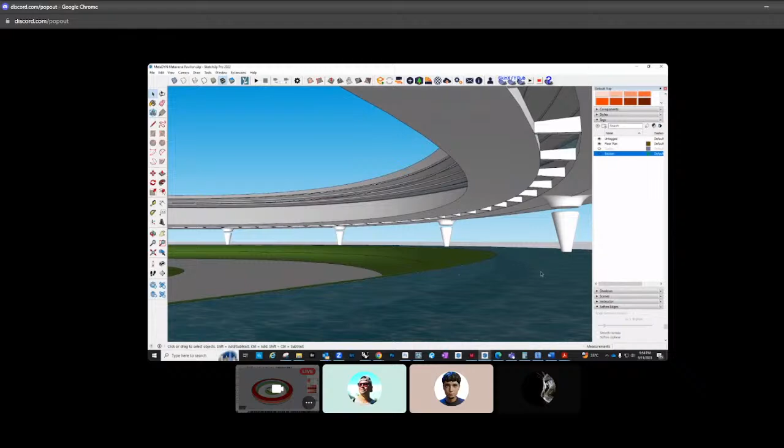Yeah, and there is another question from Cyrus, if you can talk about the process and the best way to reduce the vertices and faces. Okay, so the best way to optimize? Exactly. Good question. Honestly, to optimize, it's a bit of forward thinking. So for example, if I knew I was going to use 8 of these, like I already have this whole space mapped out in my mind.

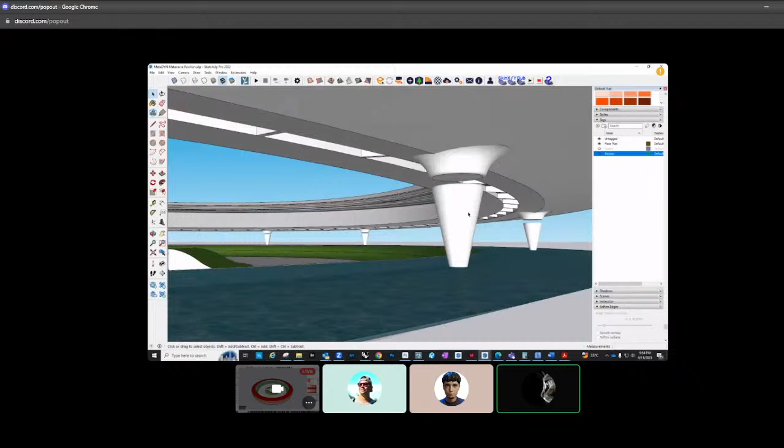I knew it was going to be a circle. So within the circle, I have control over the number of sides. I knew that I was going to have roughly 8 of these, so if they were too heavy, then it might get complicated. I knew I was going to have these berms, which are somewhat detailed.

See, as I double click, because of the face, within each face of the circle it starts to increase. But to optimize this, if I wanted to redo this at a smaller amount, I could easily do that by reducing the number of sides of this arc. So if I said 10 instead of 20 or whatever it was, if I made this my pathway

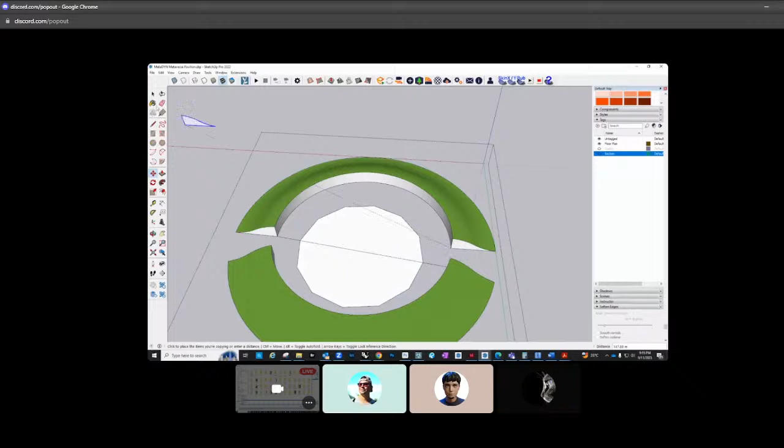and I orbited something of this form, I'm gonna do this somewhere. Let me just take this up. So I'm gonna go up here and I have this face. And I just need a path. So I take my path and I revolve here.

So you'll notice the difference in the number of faces by understanding the number of sides and the complexity of your arc. Each one of these is going to be revolved. So there's no way, after you do it, to make it less complicated. It's kind of all at once, but you might be able to optimize it in other software.

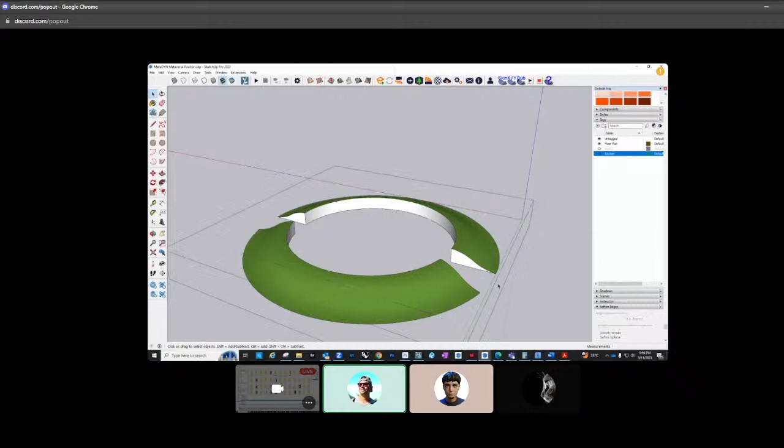Yeah, exactly. Like Blender, in Blender there is a possibility to optimize. I think it's not really the best way for like an avatar, because it reduces the quality, and it's not totally under your control. And with the modifier, which I think we will show in the next episode, there is the possibility to optimize your space with regard to the vertices.

Perfect. Thank you. It's great to understand the optimizations. For example, this faceting here, I wanted to keep it to a minimum, but also be a bit responsible with the number of polygons. Yeah, it is one of the most important points.

But just an advice from my little experience: be focused on the texture. The texture is the most important point that can change the experience in your space. If you have a lot of vertices, it's okay. If it's not too much, you can have a space that is very good to go with no lag.

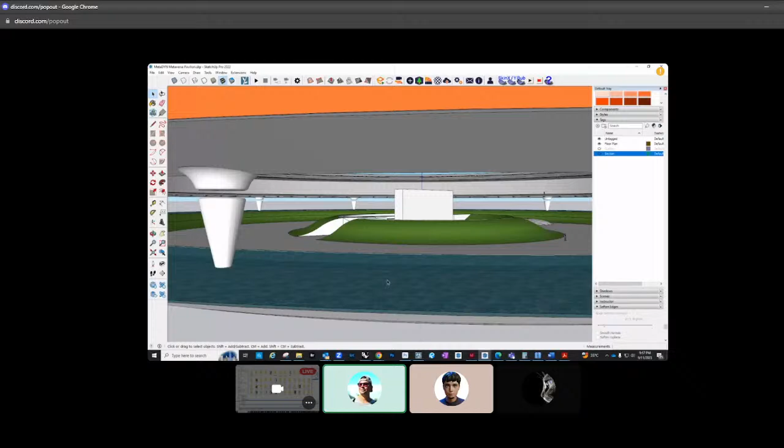It's not easy. But if you have a texture that is like a 2K texture or a 4K texture, it will be a heavy space just for a texture. This is the concept you need.

Yep. And I'll mention one other thing. If you go to model info, you'll have something called statistics, and this will allow you to purge any unused aspects. So that will optimize your model a little bit as well.

And the last thing that might be relevant is OpenGL. I have it set to use maximum texture size, so as I'm modeling, it will show the highest res possible of the texture. I think it's not on by default. So that's just in preferences, OpenGL, and you tick use maximum texture size. Wow. Great.

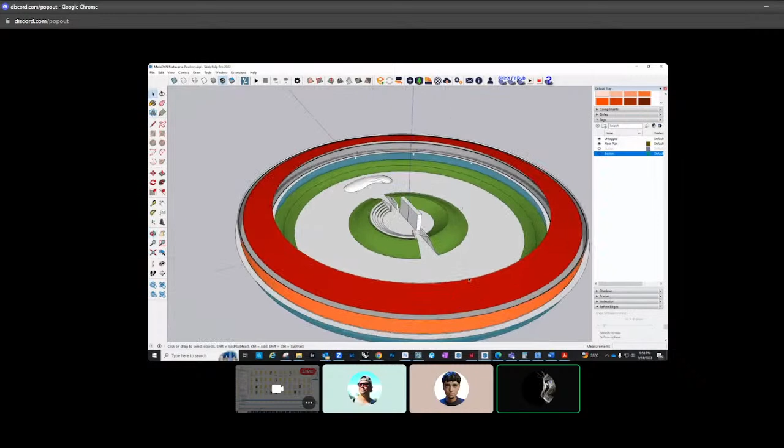All right. Amazing. I look forward to seeing how far this develops, adding interactivity, activating this space in the courtyard. It's going to be really interesting. Absolutely, and Drew, I can't thank you enough. This has been awesome. This seems like an excellent solution for people to quickly get what's in their head onto something, even just to conceptualize. It seems like something a beginner can get started with and still have the tools to do advanced stuff if they want to stay 100% in this. Thanks a lot.

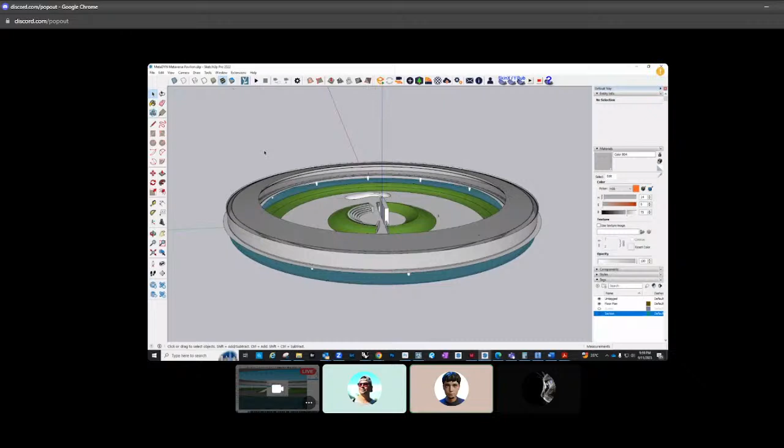Thank you guys so much for having me. And for our viewers, as has been mentioned, we're going to continue this next week. We'll be optimizing and bringing this into Unity and start to get things a little more familiar. So we look forward to continuing on.